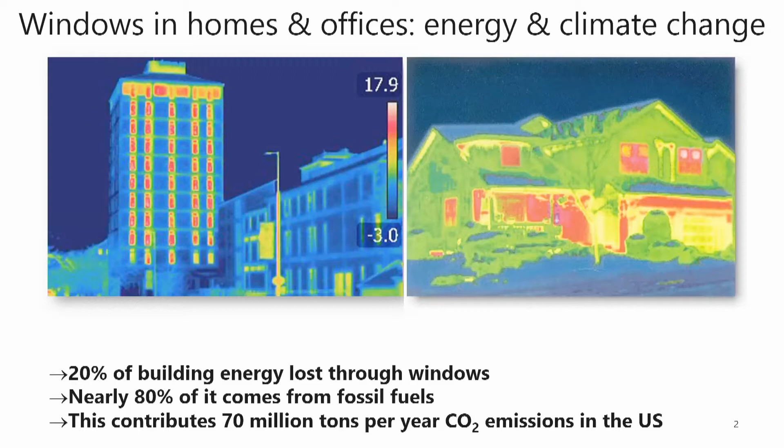This contributes to the carbon dioxide emissions, and just within the US, the energy lost through the windows is equivalent to 70 million tons per year of carbon dioxide emissions. So this is not only increasing the energy demand, but also contributing to the climate change. And the question is, is there something we could do about this?

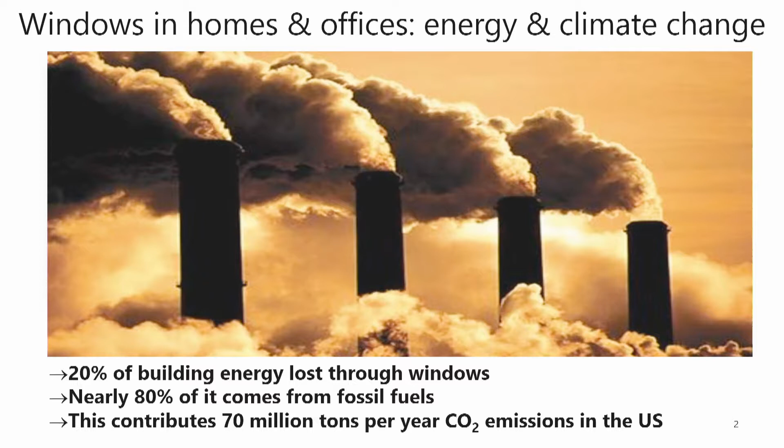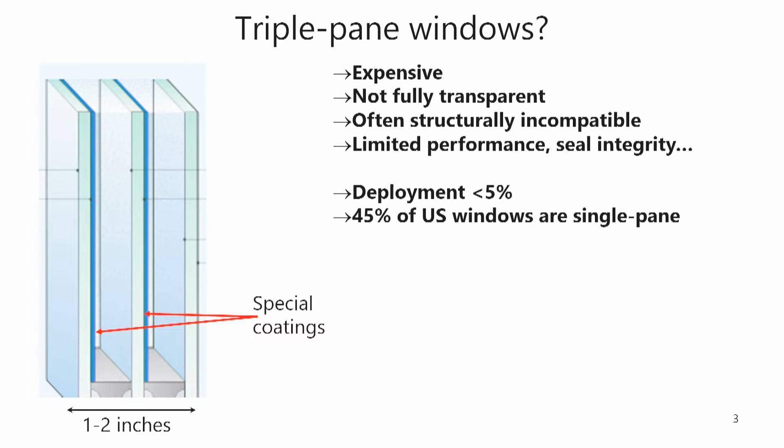Well, perhaps we could think about the triple pane, triple silver windows we have in here. Unfortunately, they are very expensive, not fully transparent. Their performance is actually not so good, and their durability is limited by seal integrity. Because of this, the deployment is only 5% or even less. And I should remind you that in the US, we still have about 45% or so of single pane windows at the very same time.

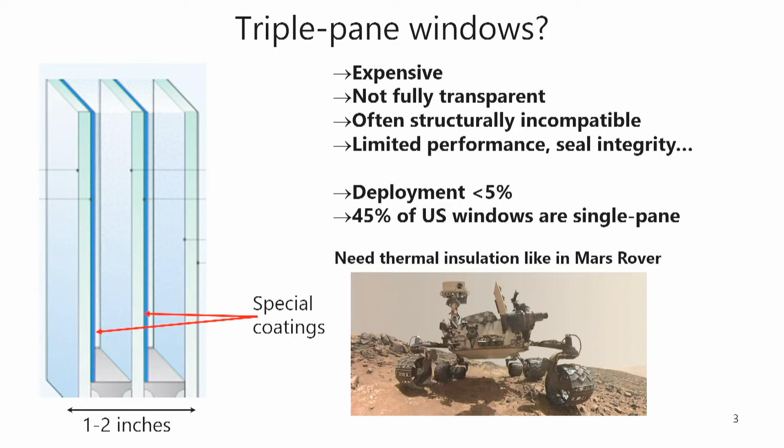To truly solve this problem, we would need an insulating material like the aerogels that are used in Mars rover and other space applications. However, you realize that for windows, we also need transparent materials, right? We need to see through them for their primary function. And such materials have not been available until now.

Here we introduce transparent, super transparent aerogels that are also flexible and therefore can be simply laminated atop of window panes. You likely did not notice that on this window in here, through which we view the beautiful mountains in Boulder, we actually have an aerogel film. This is because the transparency of our aerogels is much better than that of glass.

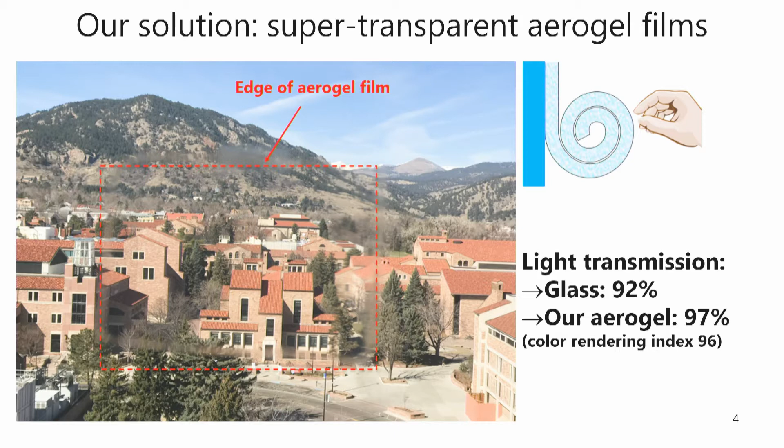Glass transmits only 92% or even less of visible light, while our aerogels can transmit 97%. Moreover, by controlling the nanostructure of these materials, we could bring the haze and scattering nearly to zero, and we achieved very high color rendering index, which means that you can view natural colors through these materials without distortions.

What's more important is that these materials are also excellent thermal barriers. You can see this by placing a thin 1.5 millimeter thick film on top of a hot plate together with a glass slab. And the temperature of the surface of this material, as you can see in here, is very close to the room temperature despite the high temperature of the hot plate at 60 degrees Celsius.

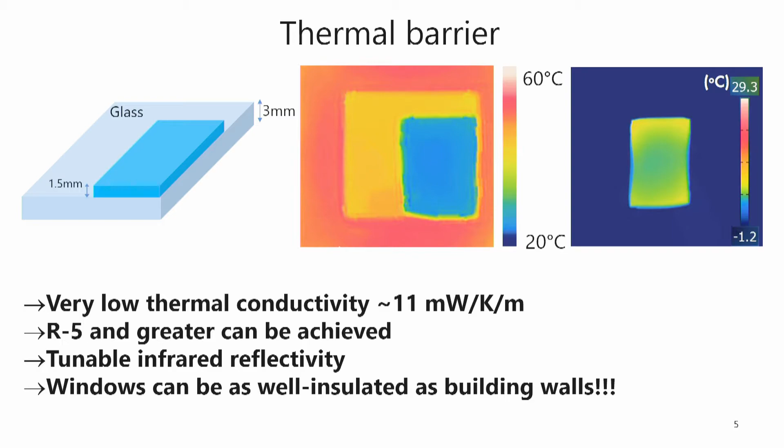These materials insulate equally well also in cold conditions, for example, as we place them on top of a cold surface. And this is because they have very low thermal conductivity of 11 milliwatt per Kelvin per meter. With these materials, we can achieve R5 thermal resistance. And because of their intrinsic low emissivity at the same time, we can now think about windows that will be as thermally insulating as the building walls.

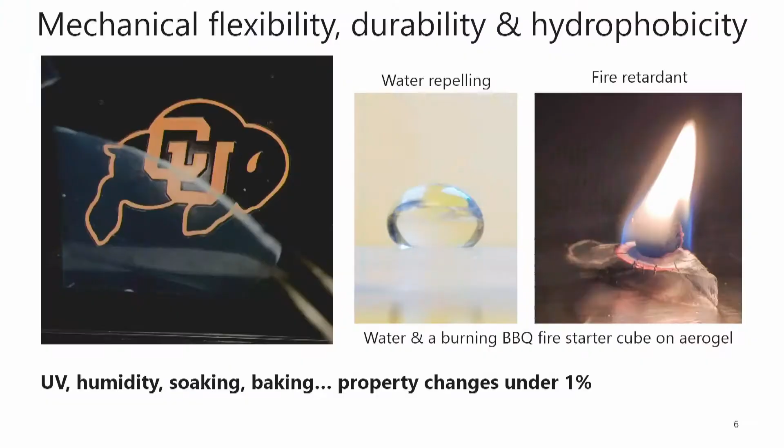Of course, for applications as retrofitting materials, we also need flexibility. And you can see from this video that we can achieve flexibility comparable to that of rubber. And on top of it, these materials can be made water repellent and fire retardant. As you can see, when we place this barbecue fire starter cube on top of our aerogel, it does not burn, right?

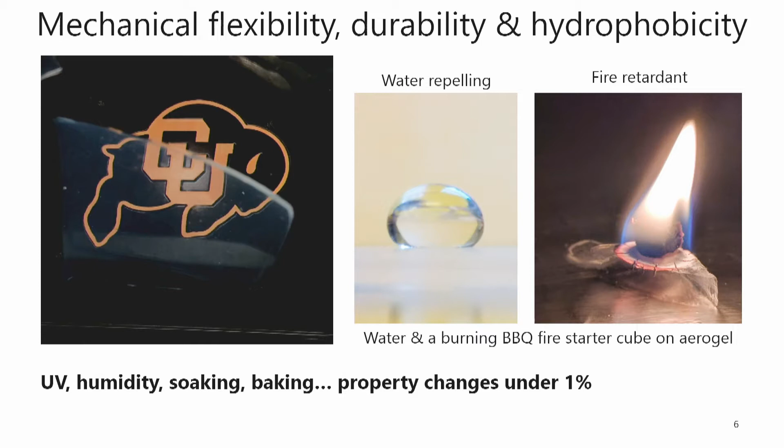And moreover, as we test durability by exposing them to ultraviolet radiation, by soaking them and baking them, we do not see much change of their properties, under 1%, comparable to the error of these measurements. Now, what's more is that these materials are made using waste with the help of bacteria.

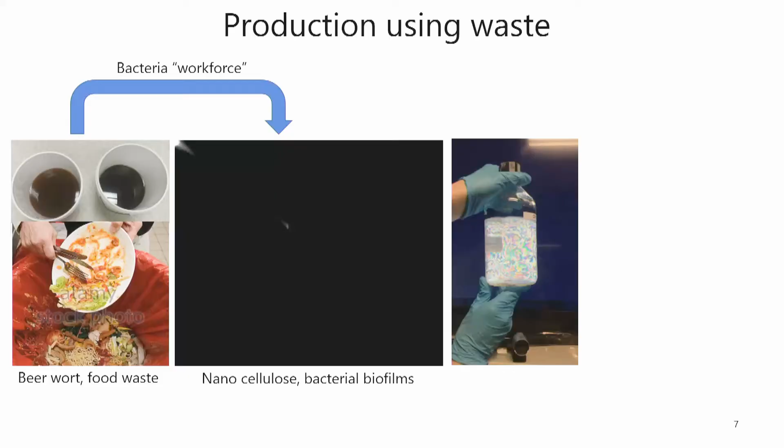So my students sometimes go to Boulder breweries and take buckets of beer wort like this, not only for free, but they are even offered free cases of beer for taking it. This is waste, right? And they feed this stuff to bacteria, which then, in the process of bacterial biofilm production, make cellulose nanofibers that then can be self-assembled into liquid crystalline colloidal dispersions in large quantities.

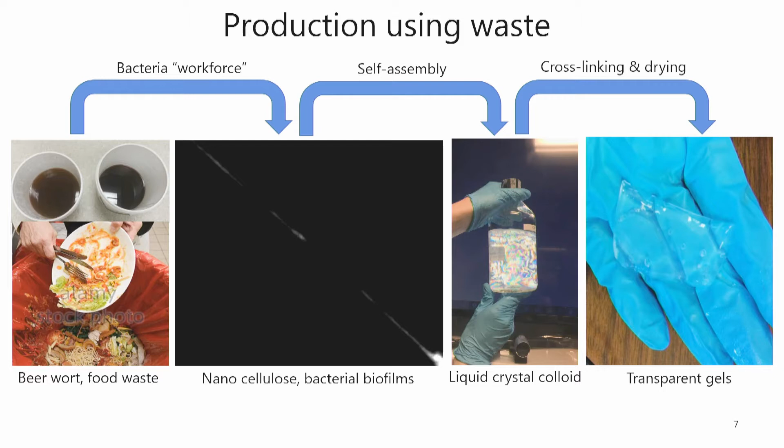Then we can convert these self-assembled materials to ordered aerogels through cross-linking, drying, under ambient conditions. And this is very important, that in addition, we can also control the nanostructure and chemical composition so that these materials can be used in many applications depending on the temperatures, transparency, and other requirements of these applications.

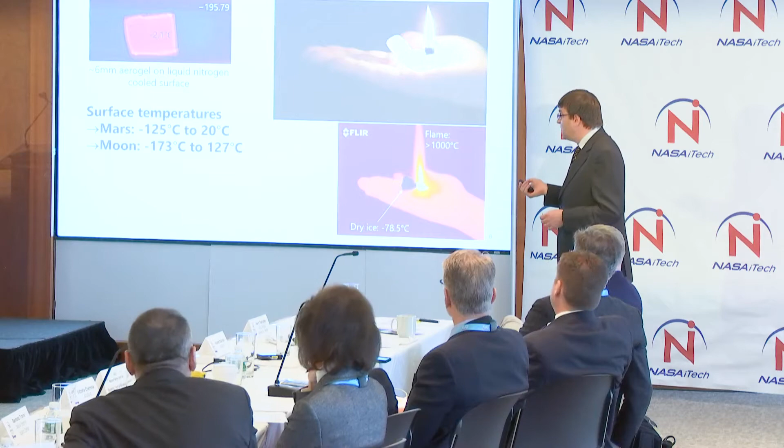This is useful for space applications too, because the temperatures of extraterrestrial bodies can fluctuate from negative hundreds to positive hundreds of degrees Celsius, like in the cases of Mars and Moon, for example. And you can see that we can equally well insulate from such cold temperatures, for example, a liquid nitrogen cooled surface in here, using such aerogel films.

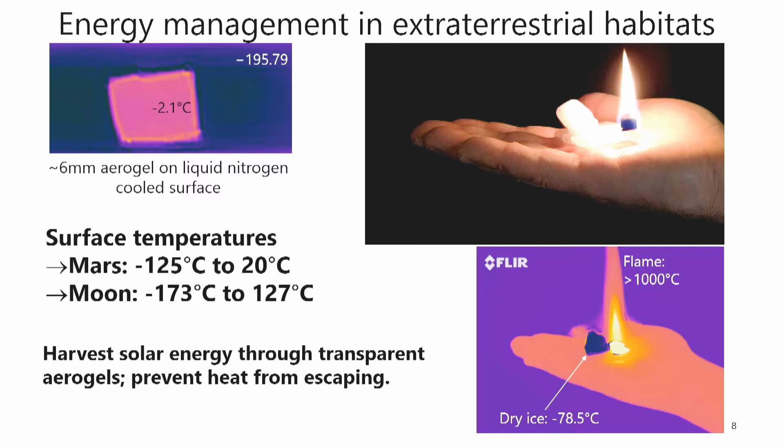Now, what's more is that these materials are transparent in the visible and near-infrared part of the spectrum. So you can harvest solar energy by absorbing it inside of habitats of some kind. And then, because aerogels are so thermally insulating, this energy can be stored like in a thermos.

Now, we are also collaborating with NASA scientists, and as I'm speaking here today, 2 of our team members, Vlad and Josh, are visiting NASA Glenn Center in Cleveland, because we do believe that there are many opportunities for extraterrestrial applications of our aerogels.

Now, within the last 10 days, we had a little baby boom in our team. My postdocs, Chin Kun and Elho, welcomed a baby boy and baby girl to their families and to this world. And this makes us think even more about the potential of our technology and the impact it can have, because we do need to save all the energy escaping through the windows so that we can slow down climate change, so that we can keep the Earth habitable for these newborns, for the ones who will be born in the future, for the future generations.

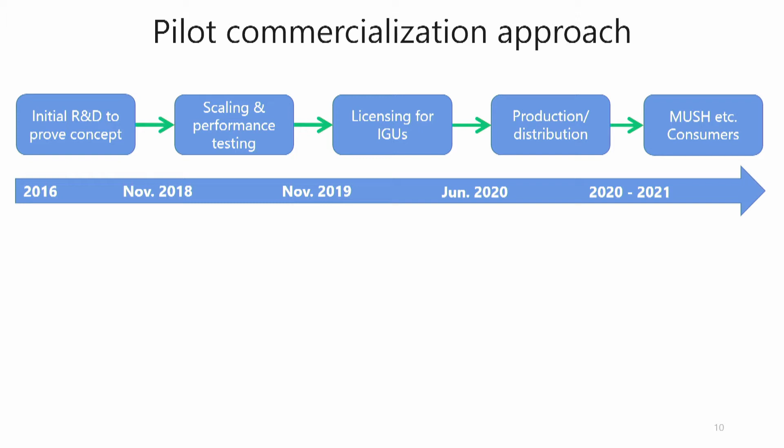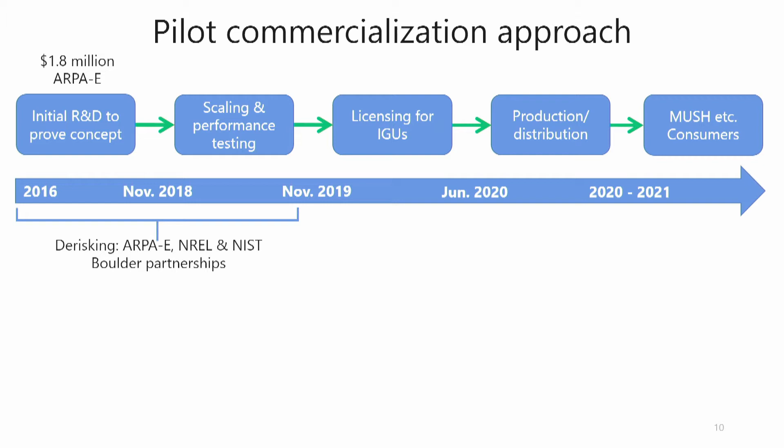Let's get right down to the pilot commercialization approach. So we wish to license our product out to insulating glass manufacturers, and because we have gotten $1.8 million in ARPA-E funding to explore the initial transparent aerogel concept, we have been able over the last 2 years, as Ivan mentioned, to actually prove this concept while de-risking it. And over the next year, we plan to continue this de-risking and scale.

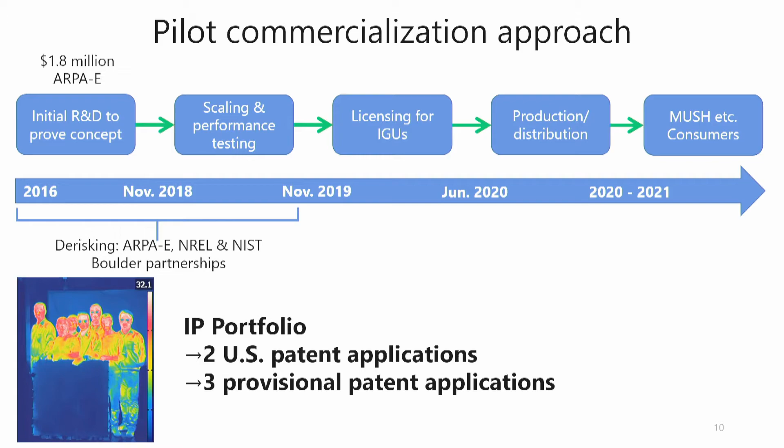So far, we've already made a meter-squared prototype of gel, and we hope to complete licensing by mid-2020 with production and distribution by our IGU licensee to soon follow. We expect that their customers will be municipalities, universities, schools, and hospitals, plus others interested in saving energy. This entire pilot scale approach is supported by our robust intellectual property portfolio, which includes 2 US patent applications and 3 provisionals in the works.

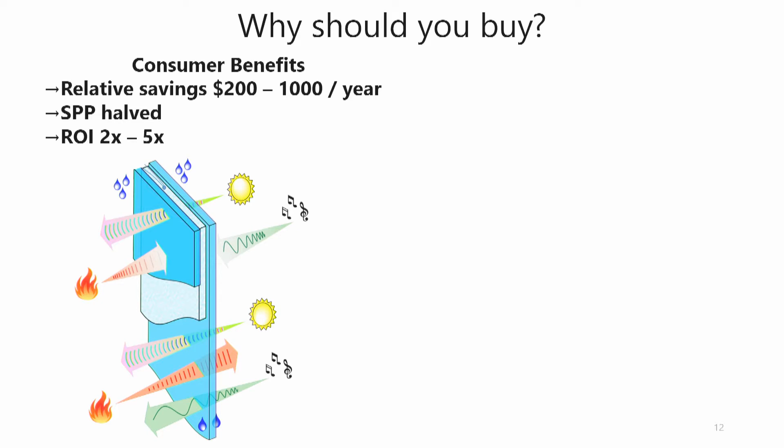But there are also other consumer benefits as well, which include per household a relative savings over conventional double pane window technology of up to $1,000, with a halving of the simple payback period, again for conventional double pane window technology, where the consumer would enjoy a return on investment of up to 5 times.

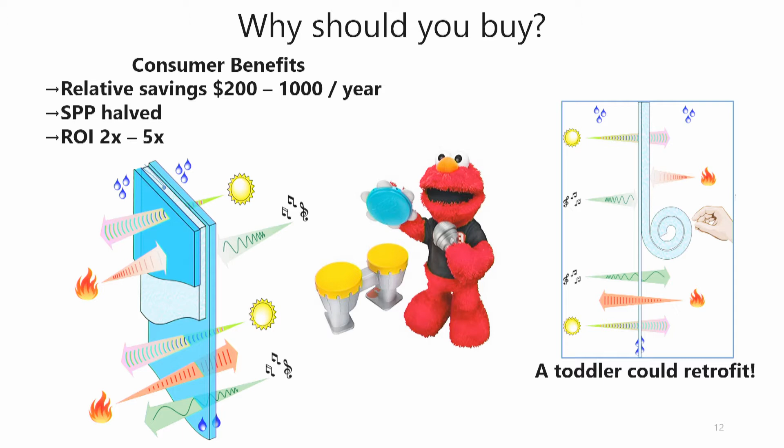But there are other ancillary benefits as well. Have you ever had a noisy neighbor at night making noise and you couldn't sleep? Well, our sound deadening properties will be able to ensure that you get a restful night's sleep. Additionally, it's worth pointing out that our retrofitting product has these benefits and more, with the added benefit of super easy, simple peel and stick roll-on installation with 0 out-of-pocket costs, which a toddler could install. So how do we expand to other markets beyond our pilot production market?

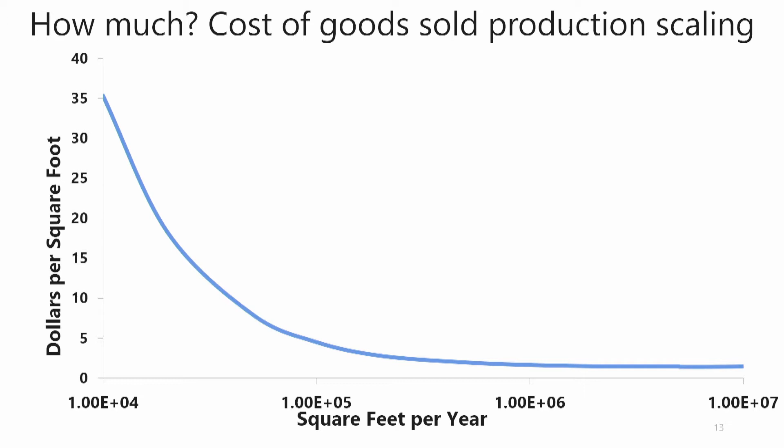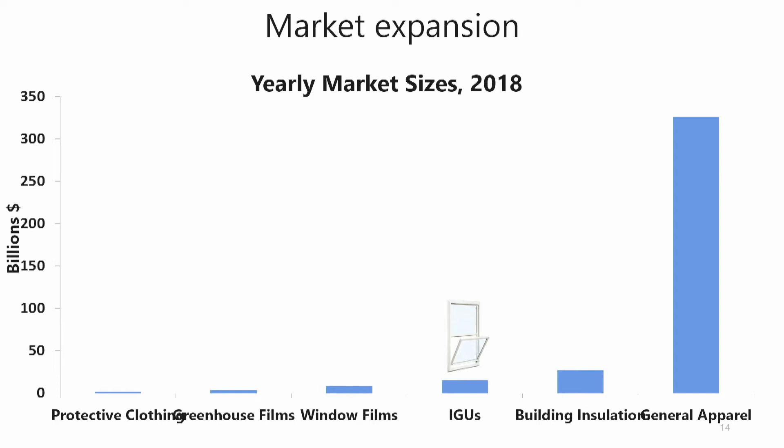This plot that I show here is for our transparent aerogel product, and it has been scaled around our initial pilot production. And we clearly see an economies of scaling, and this informs us as we move on to expand to other markets. So, of course, first we're going to enter the IGU market through licensing, and we're going to leverage our royalties to enter relatively high price point, low production volume markets, such as insulation for astronauts and firemen.

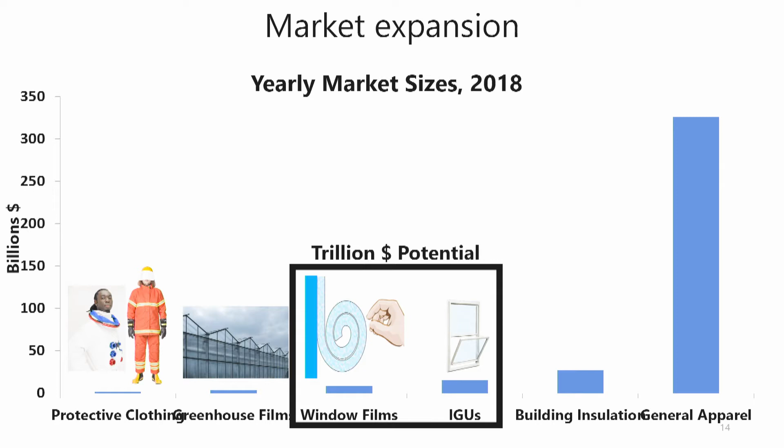And then we can de-risk and scale as we move up in production volume to greenhouses and then our roll-on retrofitting product. This retrofitting product market with the IGUs is actually a $1 trillion potential because of all the pre-existing inefficient windows that exist in the world today. Beyond that, we also want to continue to scale to the building and extraterrestrial insulation markets.

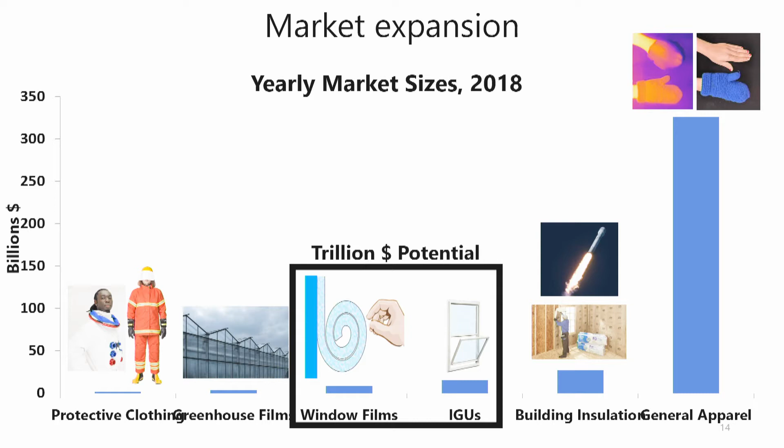And then finally, the general apparel markets, where we show a glove made from our transparent aerogel product. We can only see it in the infrared, where we actually see it works better at insulating the hand than a conventional glove does. And the little girl who's modeling it can see her pink nail polish through it too.

So how do we make these dreams come true? First, we need to expand our partnerships with NASA and ARPA-E and continue our market de-risking and research. We also need additional capital financing, investments, and donations to expand to these additional markets.

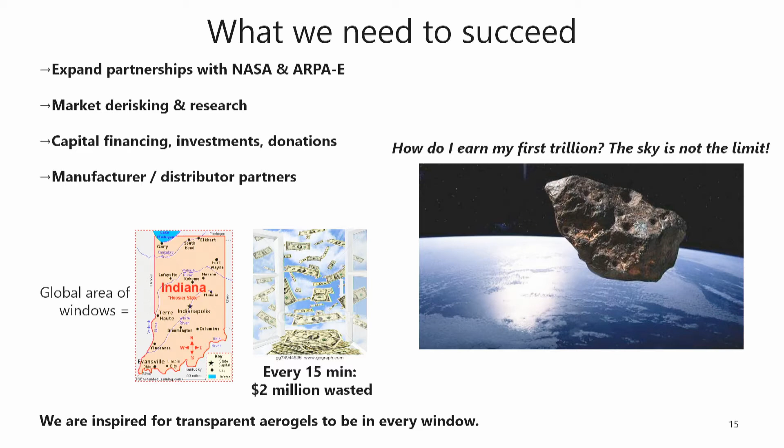So because of this, we are inspired for transparent aerogels to be on every window in Earth, but also we see huge potential in space because of space mining, which could form the first trillion-dollar marketplace, and our technology could enable it. So we firmly believe that the sky is not the limit.